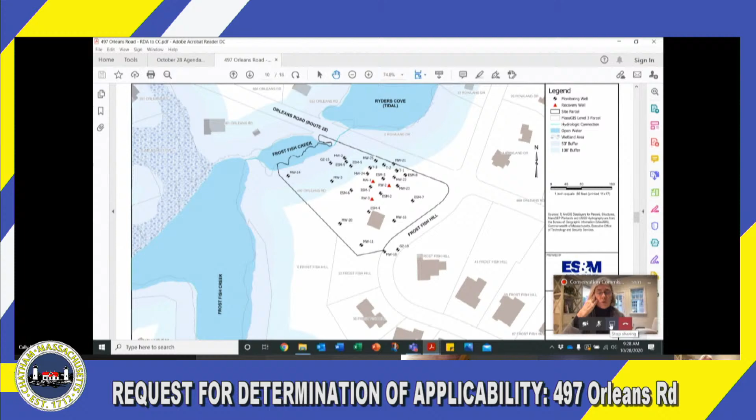Can I interrupt to say that two things are striking me about all of this. One is that the site map provided doesn't seem to have all of the resource areas, particularly the floodplain and riverway, mapped. Since this is a request for determination, we have two questions to answer. First, is the activity going to take place within a resource area? We see that some monitoring wells are in the buffer zone, so the answer is yes, but we can't tell about the other ones because the resource area isn't indicated on the map.

The second question is, will the activity impact the resource area? From the conversation you're having with the applicant, it sounds like there are all different ways this activity could possibly impact the resource area that aren't answered in a brief document like an RDA. Perhaps the better way to go would be to submit this as an NOI and provide more and deeper information about exactly what's happening, where it's happening, and how far from any resource areas, so we can assess potential impacts and create conditions to protect the resource areas, because right now under an RDA we don't have any ability to do that.

I concur with the chair's suggestion.

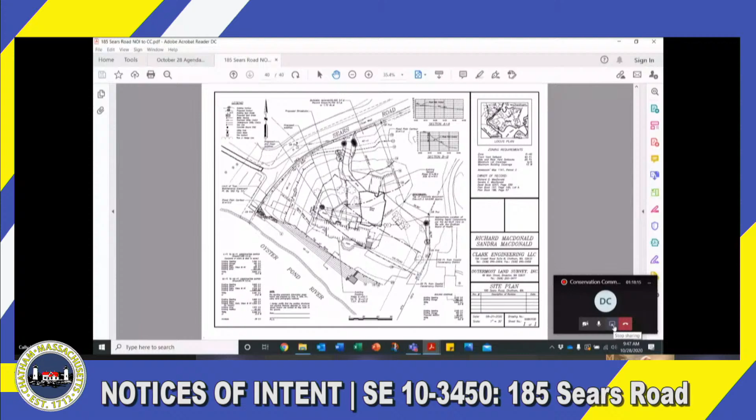Okay David, I have your site plan, which I'm showing now. I don't have a copy of your landscape plan. Yeah, that was all part of the package. Okay, why don't you guys go ahead and then I'll try to find it again. Yeah, it's not in the electronic copy. I'm just scanning through the electronic submission. Why don't you guys move forward?

Yeah, and then I'll- well, that is the question for me, because I noticed that there wasn't proposed mitigation. I accept that it's only 29 square feet of impact, but let me open it up to questions from other commissioners. Bob, do you have anything? No, not at the moment. I thought there was no mitigation offered, so I guess we need to see that missing plan.

Bob Delvecchio, you have questions? Yes, I have the plan, and I see the fragrant sumac at the top of the bank as it would be planted. I didn't see any stakes when I went out there to see exactly where it would be planted, but I got an idea of where it would be. It looks like it's part of some older mitigation. There's some inkberry at the top of the bank as well. If it's part of that older planting, I'm in favor of the area it's going to be planted in.

Okay. Phil Cheney, I'm here on the line if you have any questions about the mitigation. Yeah, so Phil, it's part of the older mitigation. Well, there's a gap at the end. There's a continuation of the line of existing fragrant sumac. There's a gap at that end of the line that I thought it made sense to close in and fill with some more. Oh sure, yeah, that sounds good to me. Okay, that's all I had.

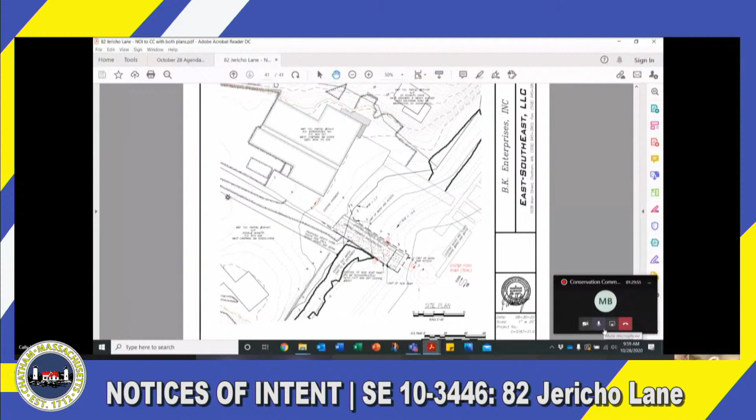So what we've proposed is to steepen the ramp to a proper slope, which is 7 to 1. This provides 3 feet of water at low tide at the end of the ramp.

Now, originally we were going to try to shorten the ramp by 6 or 9 feet, but it was brought to my attention by the boatyard that they run trailers up around the garage area, and if we start the new slope, it'll create a trench up at the top of where the ramp is now, and the trailers will get hung up on it.

So what we did in the revision was start at the existing outer edge of the ramp, then move landward, and the 7 to 1 slope meets grade at about 53 feet. This way they have plenty of room.

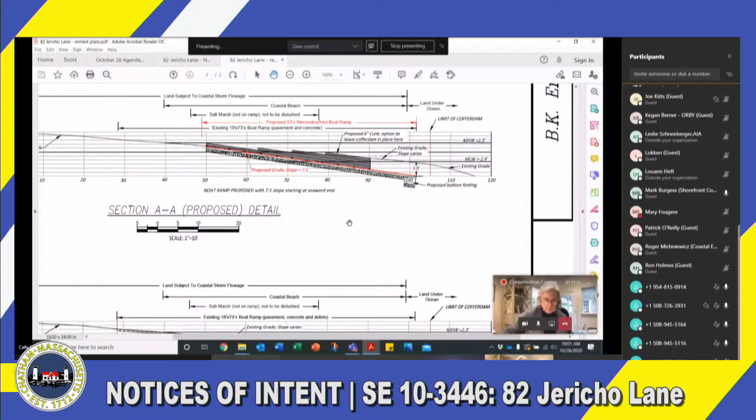Well, I said that starting at the existing end of the ramp and going landward, the ramp will be shorter on the landward side. We need 53 feet to meet the existing grade.

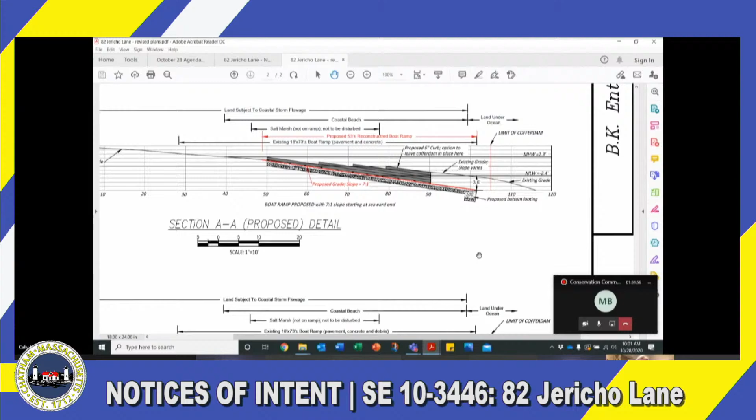Basically, the way this is done - and I've done a number of these for municipal projects, and I redid a private boat ramp as well - we encase the whole boat ramp area in sheet piling so the work can be done in the dry. The top of the sheet piling is a couple feet above mean high water so we can account for some storm surges.

Once the sheeting is in, the area can be worked in the dry. The soils can be removed, the proper stone base put in, and then the concrete sections, whether precast or cast in place, get laid down. When it's all done, you can remove the cofferdam and everything's back to normal.

The grades on the north side should match when we're done - meaning we're going to take out the hump that you see out there, and by the time we get down to the end, it'll be the same as the grades on either side of the ramp now. This ramp is kind of acting like a groin or a jetty, so the sediments will be freer to move along the river.

The other thing I wanted to be clear about - I had a conversation with Ted Keon about permitting for this. I was under the impression that only local permitting would be required because that's what I'd done before. So I'm going to say the three words that my wife loves to hear: I was wrong. This does need a dredging permit.

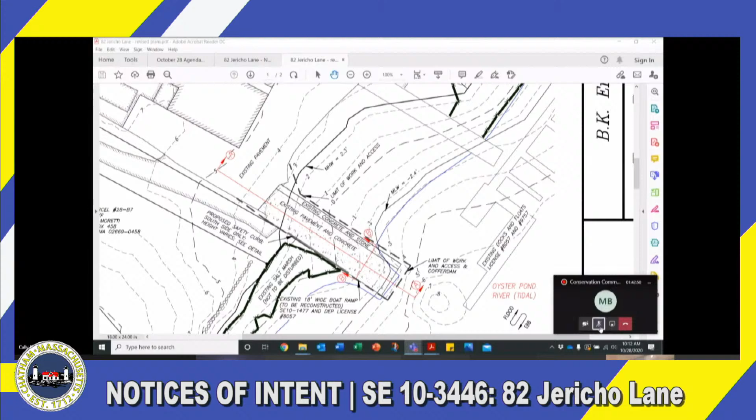Okay, so the hump that I'm talking about is really the existing ramp as it is now. As so much of it is above the low tide line, it's just this bulbous landform that's not doing any good to anybody. On the plan, if you look at the proposed detail at the bottom of the screen, where it says existing, yeah, right there, that's good. Out on the outer end, right where your cursor is, it says existing grade. That's the hump, so that gets removed. Oh, okay, I see it now.

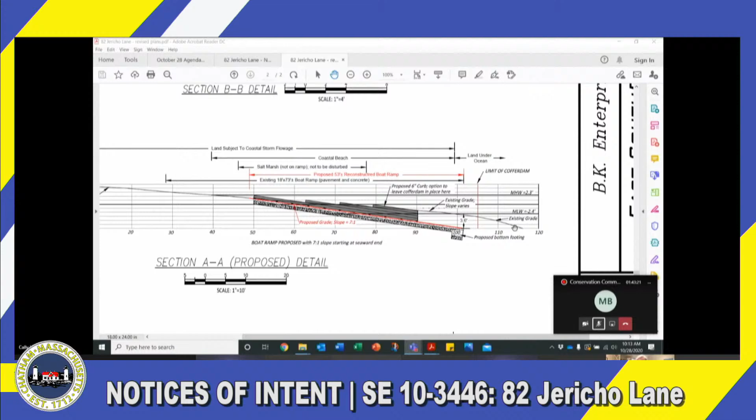Okay, and the hole, if you look on the site plan, the hole is that looks like an 8-foot-deep hole right at the end of the ramp. So my guess is within some tide cycles and currents and everything else, any extra sand that's beyond the cofferdam is going to end up in that hole, and the whole area is just going to smush together, and those contours will end up being straight lines instead of curved. Okay, so that's the hump and that's the hole. That's the hump and the hole. All right, yeah.

So during your presentation a moment ago, you said in the application it said that there was an option for leaving the cofferdam. It sounds like you've decided to leave it. So I think when you resubmit whatever we asked to be resubmitted, you want to say definitively what will happen. Not when we have an option in there, we don't know how to deal with that in terms of writing OOCs. So whatever it is that you've decided to do, just have that be in the NOI or in the amendment.

Yeah, I can revise the narrative to state what we needed. And on the site plan as well, which also refers to it, I think, as timber. Okay, obviously we needed to get this filed to get it in the system. So since then, we've been talking to Chris, and we all agree it's just better to leave the sheeting in place once it's there. Okay, that helps with our writing our findings to know that that's the decision and it's made. Right, yep, that's all I have.

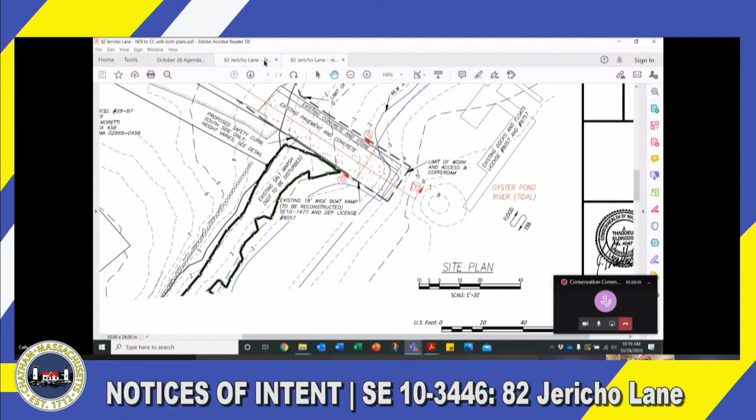We have the variance language and I can put it up here on the screen. The variance language is contained within his narrative. You see the different alternatives discussed on page 2 of 5. He discusses 4 options, and then in a letter dated December 23rd, he officially requests the variance. It's on page 30 of 41 in the digital filing, but it's a standalone letter.

Do you see that, Tom? Yeah, I have the letter and I'm looking at it. The alternatives that Mark discusses begin on page 2 of 5 of his narrative, and then continue on to page 3 of 5.

Janet, I also have a few items for the end when the commission has finished asking questions. While Tom's looking at that language and assessing it, Ron, do you have any questions? No, I have no questions.

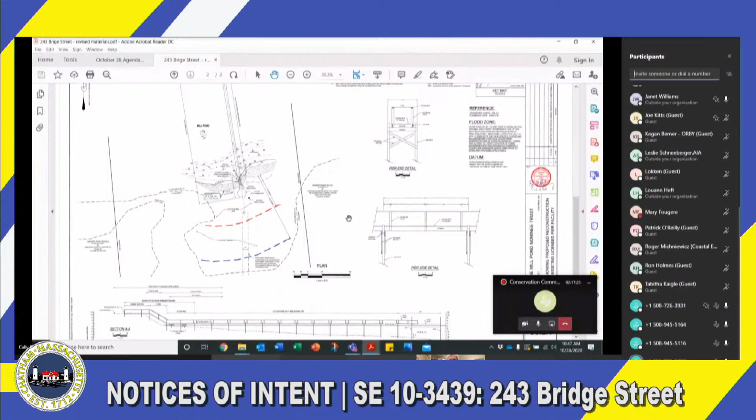Good morning, this is Roger Michniewicz from Coastal Engineering, representing the owners of this property. This being a continued hearing, there were a number of questions and concerns at the original hearing for the project. In response, we went to the site, obtained additional site-specific information, and made additional revisions to the plan, resubmitted. If we can bring it up on the screen, this is the revised plan for the project.

I can go through the various items as I recall. Yes, if you would please walk us through the changes, that would be appreciated.

One of the concerns was the actual 20 by 20 float, and the commission wanted to reiterate and be sure that the actual float units themselves were encased PVC encased foam. There was no raw foam floats. So what we've done is we added a note to the plan that that's exactly what needs to be done. If it doesn't exist, when the facility is put back in the spring, it will be outfitted with the encasement. It's a standard item, so it should be easily accomplished.

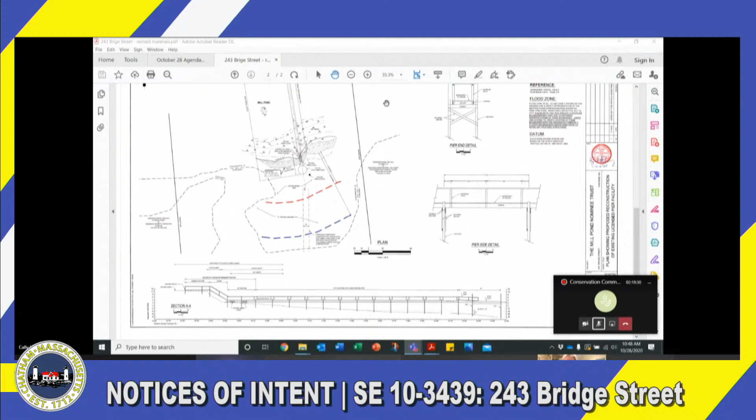The other major concern was the water depth, and I guess there's a number of these pier facilities where the floats actually sit on the bottom at mean low water. We were able to go out and do survey work and produce the profile now at the bottom of the plan. We put bottom information, elevation, and you can see that the entire float from one end to the other has at least 2.6 feet of water at mean low water. So I think it's fortunate here, this site still has plenty of water depth at mean low water. So that's what's represented on the plan.

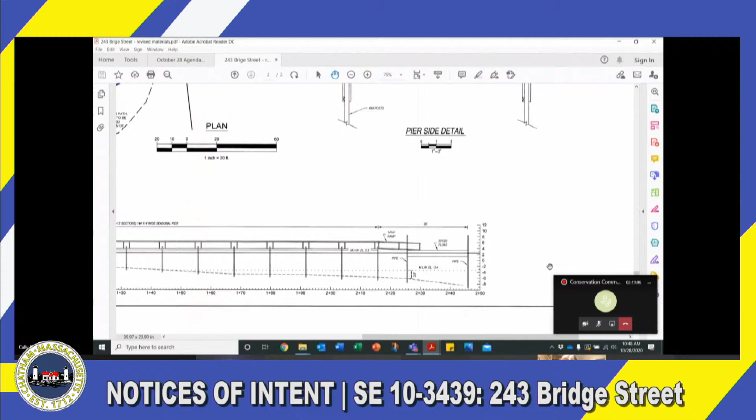Other comments were there's an existing rinsing station at the site that we didn't have on the plan. We've now shown it, and in talking with the owners, yes, they...

Uh-oh, Roger? Oh, we seem to have lost Roger. Let's see, it's still showing as he's on the platform. Maybe he was. Of course, that could be a ghost, as often happens.

Well, I think he got through most of what the commission had asked for. He was going to talk about the rinsing station. Yep, which he did cite on the plan. Yep. I would imagine he was talking about, obviously, this existing rinse station here.

That was the only other thing I think the commission had asked about - Bob Del Vecchio mentioned that there was some erosion on the bank. His site plan also shows the existing clay drain pipes to be removed from the beach.

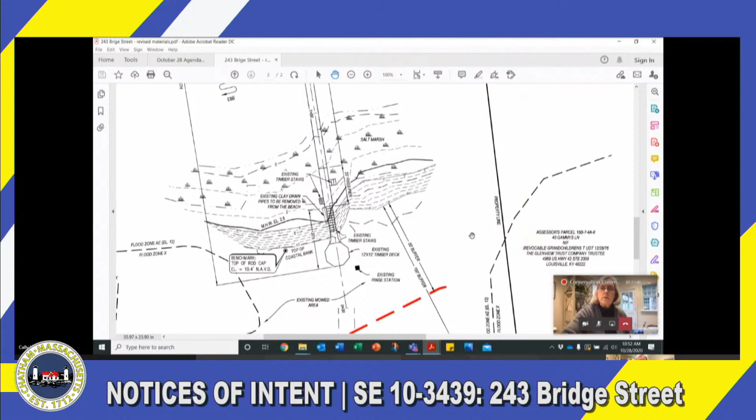Okay. Tom, do you have a follow-up on that?

Yeah, I noticed that the erosion on the bank extended beyond the clay pipe, and again, when you talk about capping it off or removing it or whatever, are you saying that there's no input now into the pipe? That is, it's not conveying water, even though there's clear evidence of water-caused erosion on the bank?

Well, I believe I'm getting my information from the owners of the property. I don't know where this comes from, and I don't see anything on the site anywhere as a source for the water. So if there is any water, it's maybe rainstorm groundwater getting into a joint, perhaps somewhere else within the soil mass, within the lawn area, something like that. But I think we're proposing to cap the pipe to preclude any future water coming out of this pipe. It would just stay within the ground, like it does everywhere else on the site.

Okay, well, there seems to be, like I said, I'd be happy to meet out there with you and point it out to you, but there's very clear evidence of erosion. Actually, looking at your drawing, if you go from the timber deck west, you have a line there that talks about the mean high water, and maybe that's what's getting into the bank. But that area where you've got the hump on the mean high water line at 2.5 feet, I assume, clearly shows a lot of erosion happening there.

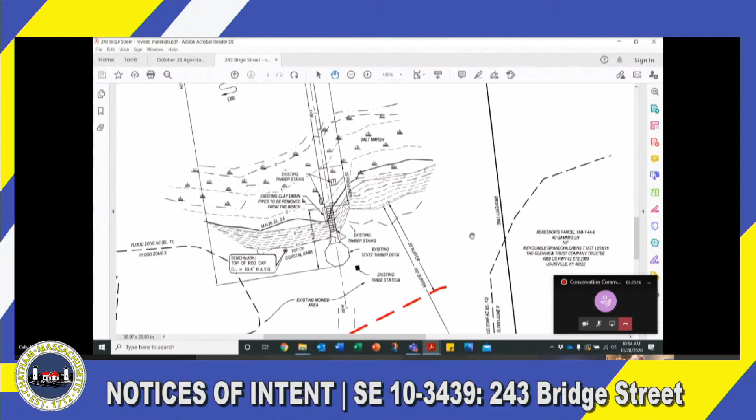The other thing I noticed while I was out there was this meets the old standards, particularly going over the salt marsh. There's been some recent publication of research, led by John Logan, one of the state folks, that says in order to minimize impact on the salt marsh, based on his experiments reported in the literature, the height of at least that part going over the salt marsh should be 1.5 to 1, not the usual 1 to 1. They also point to - well, you're already north-south, which is ideal from their point of view.

And then there's one other finding that they made from their research that doesn't leap out at me at the moment, but would suggest that the guidance currently out on these type of structures is dated, to say the least. I don't know if you've seen it, if you'd like me to send you a copy, but I think the height of the pier going over the salt marsh needs to be increased. And then the other suggestion made as a result of that work was that the spacing of the piers also be maximized.

Thank you. This is Roger again speaking. We are well aware of the Division of Marine Fisheries criteria of the 1.5 times ratio.

This being an existing structure, fully licensed, we propose to keep it just as it was permitted, licensed, and installed previously. I presume the commission does have the prerogative, if they so choose, to require the pier be raised in the area over the salt marsh. That's something we would need feedback from the commission on, since this is going to be reconstructed.

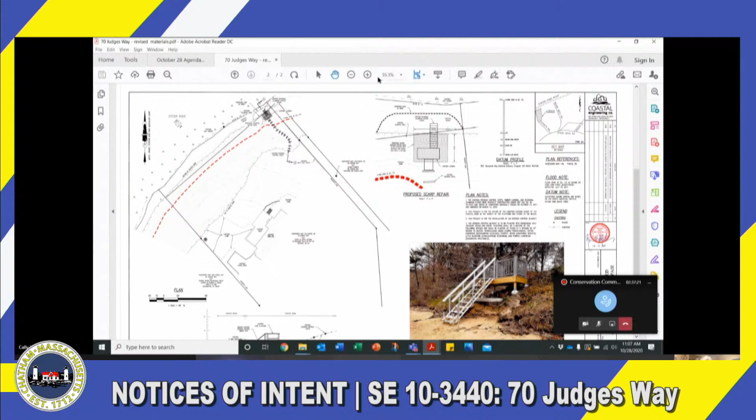Sure, Roger Michniewicz, Coastal Engineering, representing the applicants here. If you recall, our original application was based on a request by our client to do a double, multiple application, which consisted of a first concept of coastal bank stabilization using matting material and some planting, reshaping the bank slightly over this small area. If that failed under the same order, so we were requesting to also go into a coconut fiber roll installation, which we had details on the plan.

Based upon feedback from the commission, we eliminated, in discussing with the owners, the coconut fiber roll proposal and came back to just the erosion control mat proposal in the area shown on the plan view. It's essentially a 10-foot by 12-foot area. We had just given an overview, made a statement that it would be replanted or whatever, and I guess the commission was concerned that they needed more specific information.

So we got back to the owners and they reached out to Crawford Land Management. I talked to Nick Crawford and had some feedback from him. He's going to be retained by the owners to do this work, that's my understanding. They supplied me with the information shown in note 4, which is, for this area, they highly recommended these different grasses and sedge, as shown in note 4, with plugs placed at a spacing of 12 inches on center, as Nick was telling me. He said, provided the approval is obtained in sufficient time, this work could still be done this year. Otherwise, it would need to wait until after the winter period.

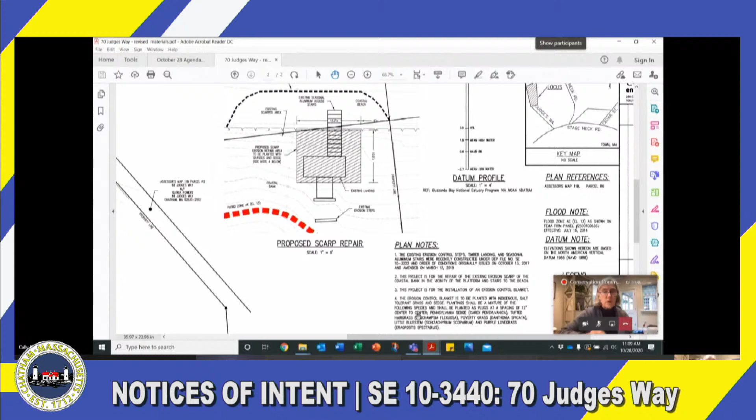It's less that. It's just that, as I recall looking over the notes from the last hearing, what the commission was asking for was a specification of the location, the size. I do see 12-inch, so I was adding density to that. And the locations should be on the site plan. You don't need a separate planting plan for this, but the site plan should have the location of where these grasses are going to be planted.

If you look up in the upper middle section of the plan, you see the existing deck and stairs going down. You see a crosshatched area that does show a 10-foot by 12-foot area. It's called out as proposed scarp erosion repair area planted with grasses, see note 4 below. But you will bring it up on the screen now, you can zero in. I'm just dealing with some background noise. Yeah, here, we brought it up on the screen. You can see it right here.

Okay, and then the note refers to note 4, which has the details of the plantings based upon feedback from Crawford Land Management.

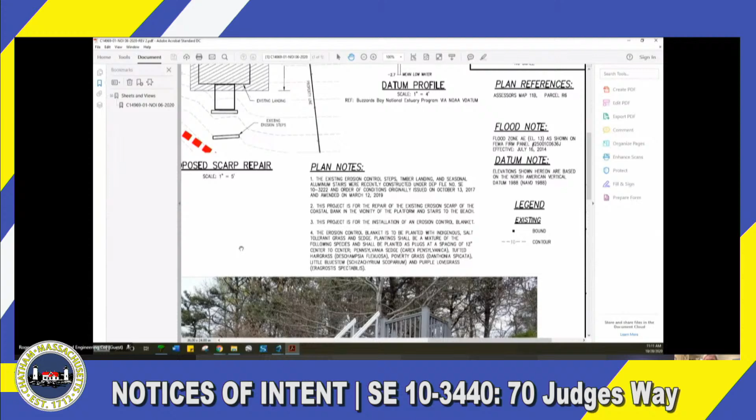Okay, this is Roger. I was responding to the comments made at the last hearing where it was mentioned that we really didn't need a planting plan, that as long as we listed the plants, and we call out spacing, and we show this crosshatched area where it's going. I'm sure that we can reach out to Nick Crawford and get a planting plan, a land management plan that that organization normally produces, but it was not my understanding that that would be required for this filing. I'm sure he can put together that plan and submit it to the commission, whether we do it now or prior to construction. It can be done quite easily.

Well, my notes from the last hearing on September, I think the 9th, were that a planting plan should be submitted specifying species, density, size, and location. My notes indicate that the concept was to plant this in the spring of 2021, not that you were trying to make a fall planting season.

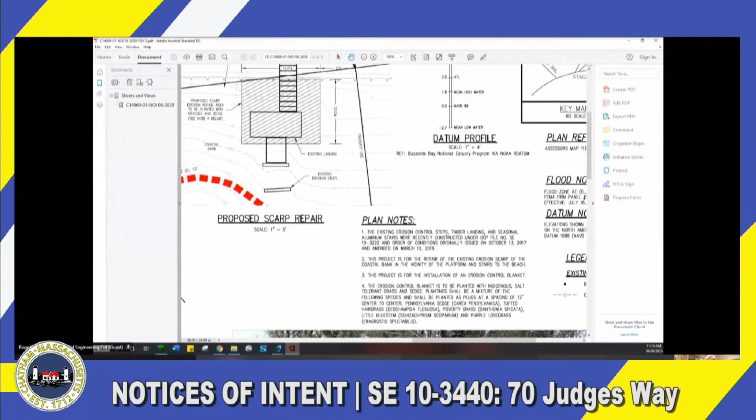I don't know if the owner is anxious to get this in for the winter season, or he can afford to wait to the springtime, so we have to go through the whole winter storm period. Again, we can go either way. It's not required to go in. It comes down to if the owner feels he would like to get it in, and Nick feels that the plantings can be put in and that they will survive and thrive through the winter into the springtime. So I'd have to leave that up to the professionals, which is Nick himself.

Okay, let me open it to questions from other commissioners. Bob, do you have questions for Roger?

Yeah, that's it. Okay, that's good points. Bob Del Vecchio, what do you think?

Same, yeah, I think those are valid points, and I'd like to see it protected before the winter storm season. I think the spacing is there, the plants are listed. It's just a 10 by 12 area. If you wanted just a basic planting scale, maybe he could provide that in the meantime. But other than that, it looks good to me.

Joe, do you have any questions for Roger? No, just one comment - when we write the order, I think photographic evidence should be provided on an annual basis. Yep, we'll add that for annual monitoring and reporting with photographs showing the current state.

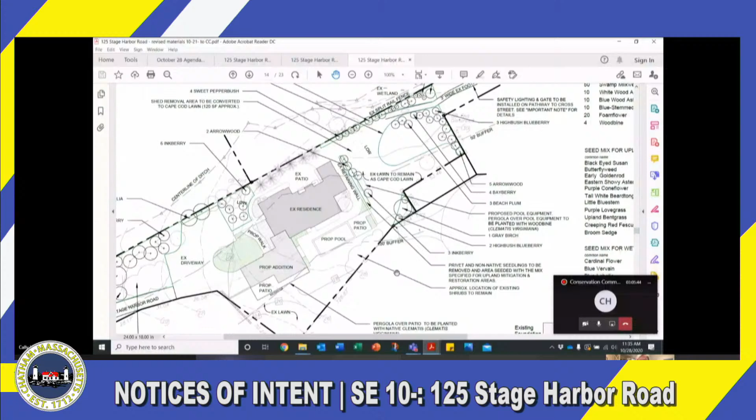One thing to note: there was an additional letter submitted on September 21st from Edward Warren, from the owners of 115 and 117 Stage Harbor Road, that I don't believe was read into the record.

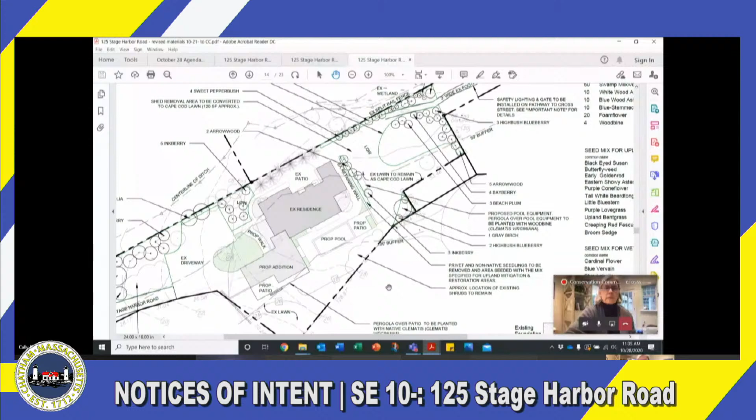While you're looking for that, I'm just going to add one extra thing to what Katrine just said. This is Leslie Schneeberger, I'm architect for the owners.

They have heard the neighbors' concern about mitigation planting on the border and repeated that it is out of the conservation area. They've repeatedly tried to get a hold of her to discuss that, so they're very open to it. They wanted to review it with her as it's truly not part of the conservation application, but they are trying to discuss it with her.

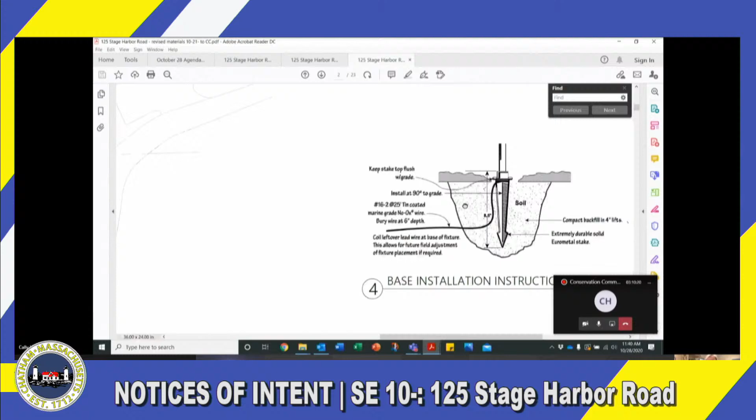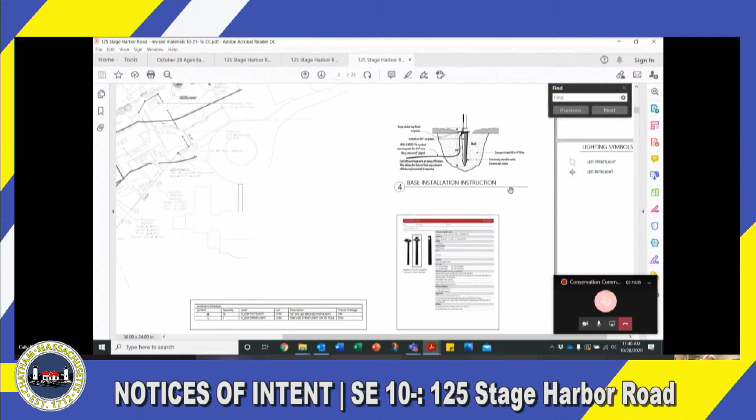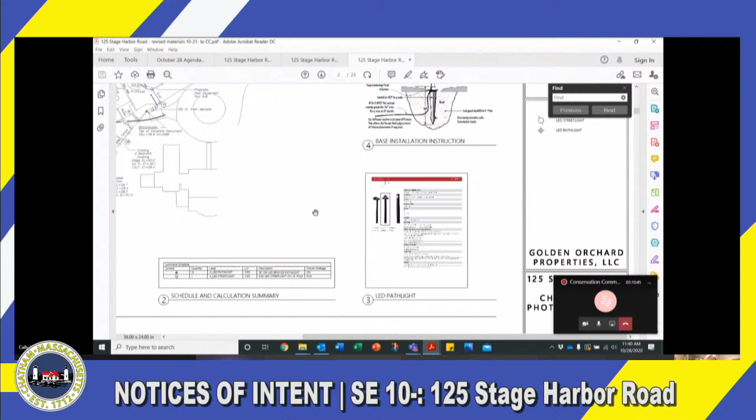I just wanted to jump in on a response here as well. Additionally, not only is the LED bulb itself recessed into the fixture, this is considered a forward throw, which means it goes down and forward, so there's not backlighting. If you notice where I have my circles in black on the lighting plan, a lot of the illumination is going in front, across the path, and not necessarily behind the fixtures, which is an added feature to these fixtures.

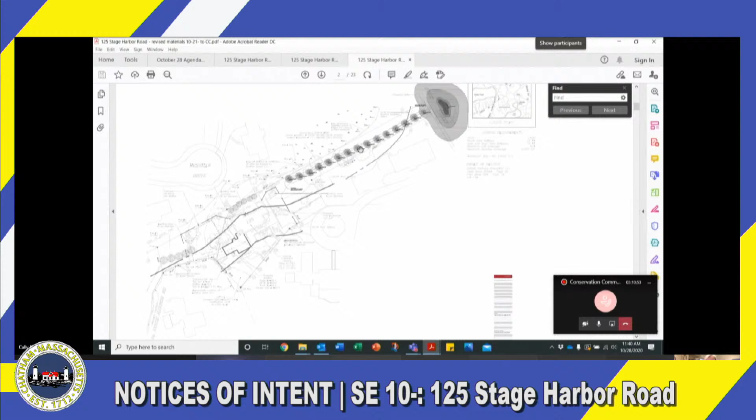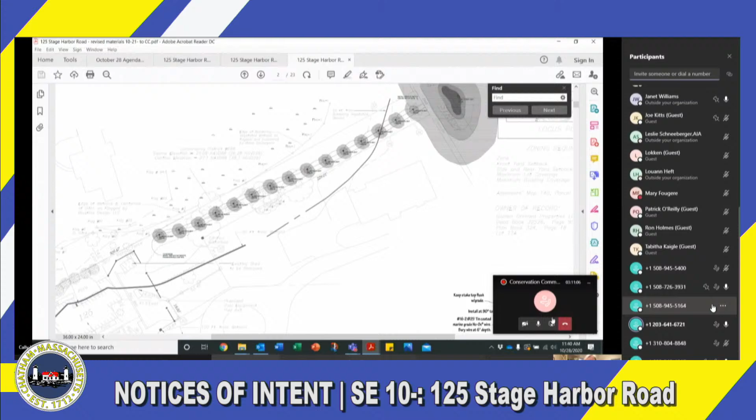These are indeed 18 inches in height. They are 3 watts, low voltage. The circles you're seeing on the plan, the very outermost gradation circle is complete darkness, a complete drop-off in contribution from these small path lights. So anything beyond that final gradation circle that you see in the plans is complete darkness.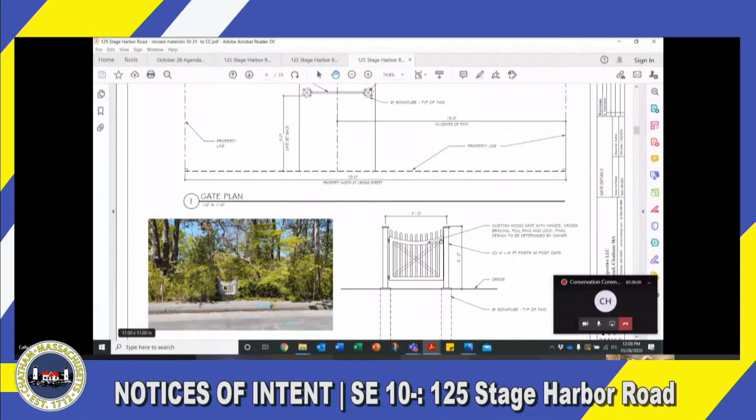Katrina, is this what you're speaking of? Yeah, if you zoom into that, you can see how there's pink flags on the right and left-hand side of the photo. That's the property. We're just talking about a gate that would allow wildlife to pass through in the area.

So there's substantial room under the gate, and obviously a larger animal like a deer isn't going to be bothered by going through the vegetation on either side of it.

Well, that's why the gate's set so high; they can go under it quite easily. If they're small enough to go under it, yes, but many critters would not be. And the only other critter is going to be a deer, which can easily walk through anything.

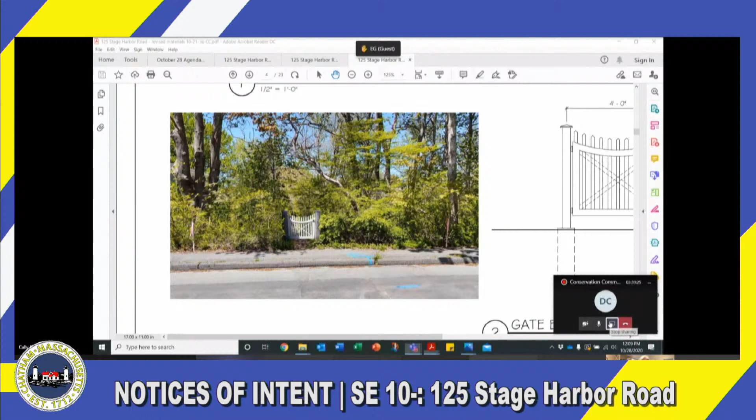There are other animals - foxes, possums, raccoons, quite a few mid-sized animals around, which would all go under the gate. All right, how many inches?

Okay, he's still a no vote. Bob Del Vecchio, are you still a no vote on the gate? Just straw polling here, guys.

Yeah, I'd say no on the gate. Okay, some other way to mark that or dissuade people from going through. Joe? I'm still a no vote. Tom? I'm a no. So there you have it, and my vote is irrelevant on the gate because you've already got a majority against it. And I think you've got a majority against the lighting as well.

So I don't know what that does for you, David, and where you want to go with that information. Janet, I know Leslie Schneeberger is trying to speak, who's the architect. Leslie, I did receive your email with a letter, and I'm ready to prepare that or read that into the record. Let me do that then first, and I think Leslie may have a comment about the previous discussion. Is that right?

I do actually, I have a couple comments. The first and foremost is I have received word from the owners, and at this time we would like to take the gate and the lighting out of the application, please.